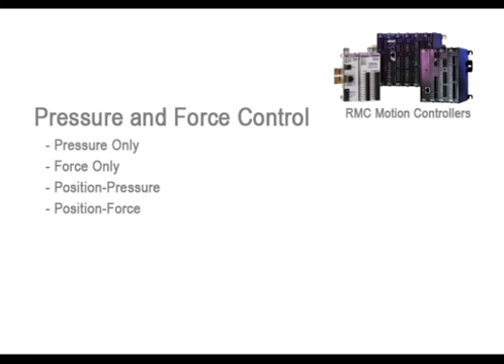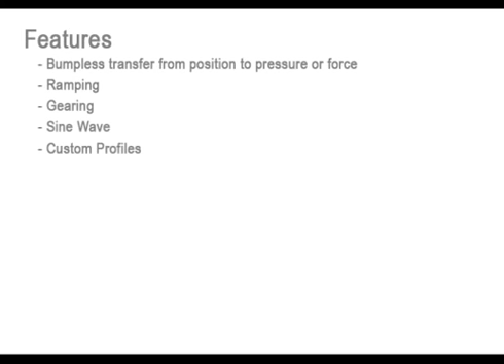Delta's RMC motion controllers excel at pressure and force control. Whether controlling only pressure or force, or controlling position and pressure or force on the same axis, the RMC is designed to make your pressure or force system perform at its best. With features such as bumpless transfer from position control to pressure or force, ramping, gearing, sine wave, custom profiles, and camming, the RMC can handle a wide range of markets.

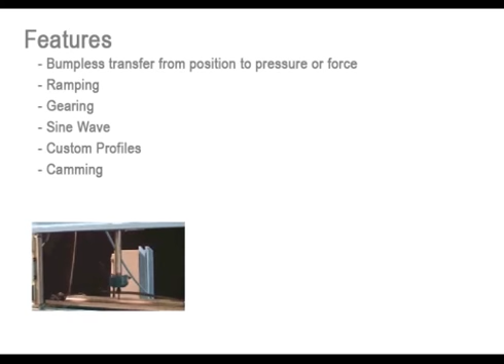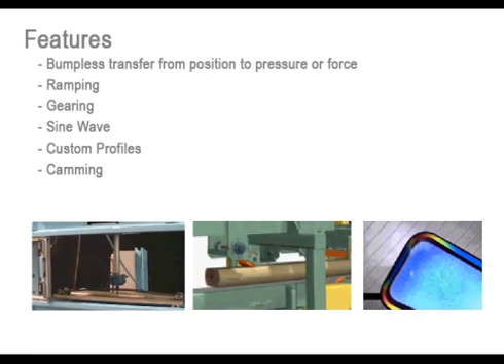For example, cyclic testing, such as this leaf spring test that requires control of both position and force, wood products, such as controlling the hold-down rolls in sawmill lines, and metals, such as controlling the fluid pressure in hydroforming or controlling the force of a press.

Delta's RMC motion controllers support several pressure or force control configurations. Pressure control applications typically use one pressure transducer measuring the fluid being controlled. Force control applications often use two pressure transducers mounted in a hydraulic cylinder, which the RMC uses to calculate the resulting force on the cylinder rod.

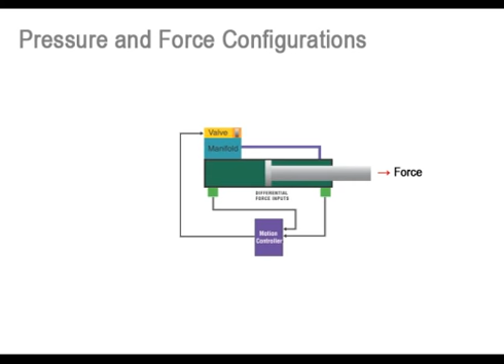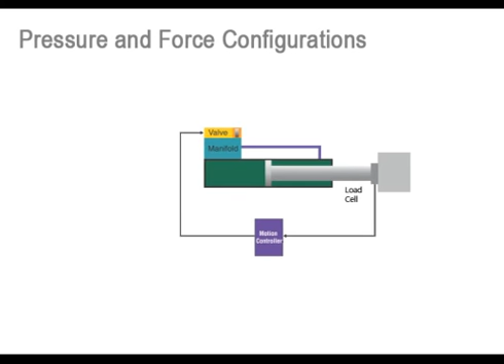This provides a good rugged solution, but does not take into account the cylinder friction. A load cell can be used for applications requiring very precise force measurements, but can be more susceptible to damage and requires mounting the load cell between the rod and the load and running wiring to the load cell. And of course, any pressure or force configuration can be combined with position or velocity feedback.

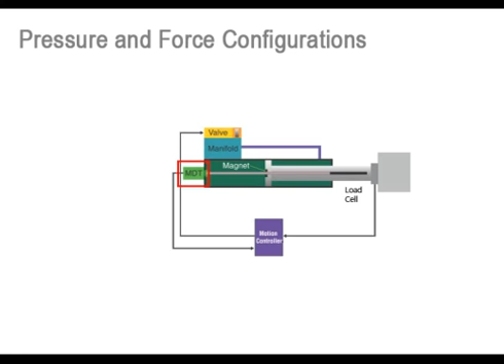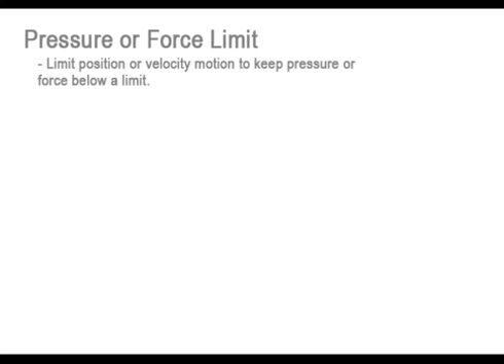The RMC also offers pressure or force limit. This limits the position or velocity motion so that the applied pressure or force does not exceed a specified limit.

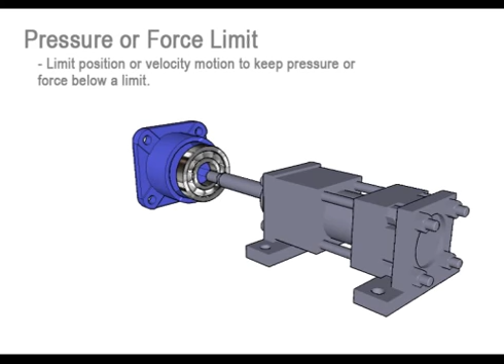For example, one of Delta's customers presses bearings into housings. The bearing needs to be pressed to a final position, but the pressing force cannot exceed a certain limit. The force limit algorithm automatically takes care of this. If the force approaches the limit, the position motion slows down to keep the force at or below the limit.

Setting up pressure or force control is simplified with RMC Tools Scale and Offset Wizards and the Tuning Wizard. In addition, the programming is easy.

For example, the following simple user program commands the axis to move toward a position, wait until the force exceeds a certain value, and then enter force control and ramps to a certain value.

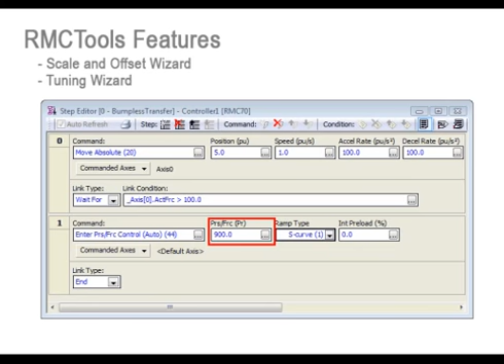The RMC Tools plots are great for making sure your application is working properly. This plot shows the results of the user program we just looked at. The position is moving toward 5, and when the force reaches 100 pounds, the axis switches to force control and ramps to 900 pounds.

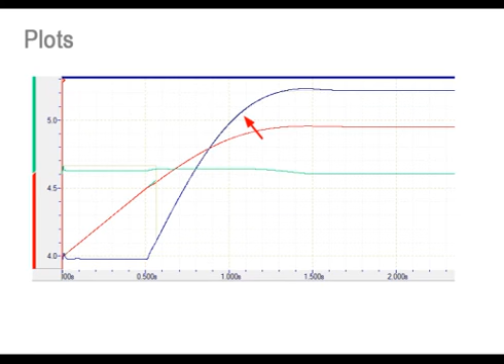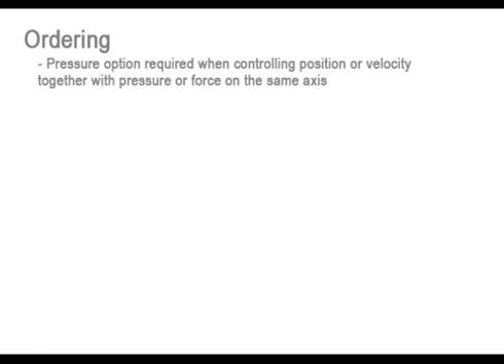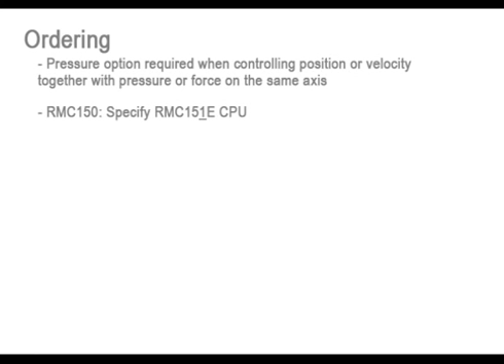When ordering an RMC, you must specify the pressure option if you will be controlling the combination of position and pressure or force on the same axis. For the RMC 150, this is specified by choosing the RMC 151E CPU. For the RMC 75, this is specified by ordering the AP2 expansion module.